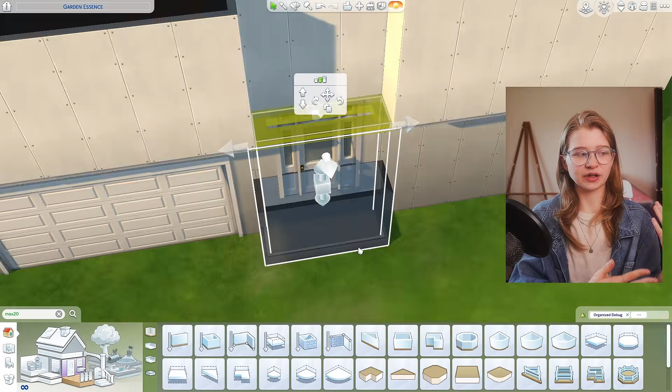He created the prairie style, which was inspired by the flat landscapes of the American Midwest, and it was the first uniquely American architectural style that kickstarted this century where America was really influential in the architectural space. And something you have to remember is that in terms of art and architecture movements, everything is a reaction to the previous thing that came before it.

Nothing is in a void. And that's why we had to start with Frank Lloyd Wright to begin with. But with the prairie style and the emergence of this American architectural movement, you have to understand that in the United States, the stuff being built before this was a lot of Gothic Revival, French Empire, Italianate style homes. Frank Lloyd Wright really wanted to do a new modern American style of architecture.

He wanted it to be distinctly different than the traditional classic stuff that came before it. And he comes up with this idea of organic architecture, that architecture should be suited to its environment, it should be a product of its place, purpose, and time. It's this very modernist idea, this idea of form following function, that's prevalent in a lot of different art movements at this time, not just the architectural ones.

Frank Lloyd Wright is credited with beginning this idea, which I have to say, there is this phenomenon in art, especially the Western art canon, where some guy is attributed as the beginner of this one idea. Certainly he popularized it and is super influential in the architectural canon. But I'm not saying he was definitely the first guy to do this. There's been so many instances where an artist or person is accredited with being the beginner of something, and then it turns out there's someone who did it years, decades, or even centuries before him.

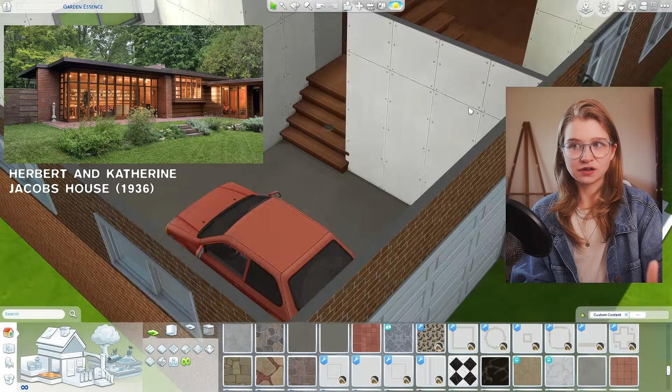But nonetheless, Frank Lloyd Wright is super influential in how we get to the split level home. He also created the Usonian style of architecture—if you guys like these videos, please let me know, because I would love to do more of these architecture deep dives with you. Usonian style of architecture is so interesting because it's the specifically American style of architecture. It literally stands for United States of North America, which is such a mouthful that I always have to think really hard before I say it, or I'll mess it up. But yeah, at some point I'd love to deep dive into that architectural style.

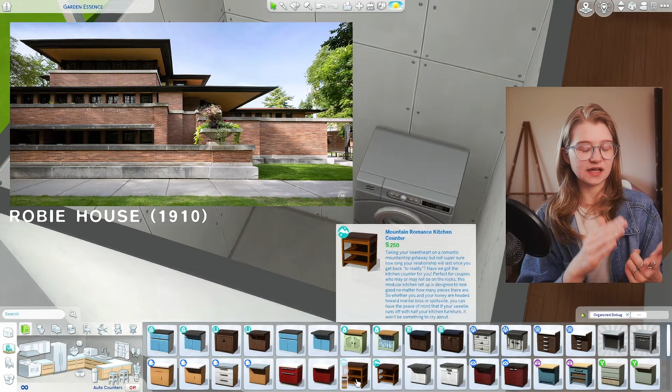But to go back to the prairie style, it was characterized by these low horizontal lines. Like I said, it's inspired by the landscapes of the American Midwest. So it's flat, low to the ground, a little more expansive, it has open floor plans, low-pitched roofs, overhanging eaves, and this connection between the interior world and the exterior world—this connection between inside and nature happening in the prairie style. I've been showing photos this whole time of different prairie style houses that Frank Lloyd Wright created, and you might be thinking to yourself, these aren't that monumental.

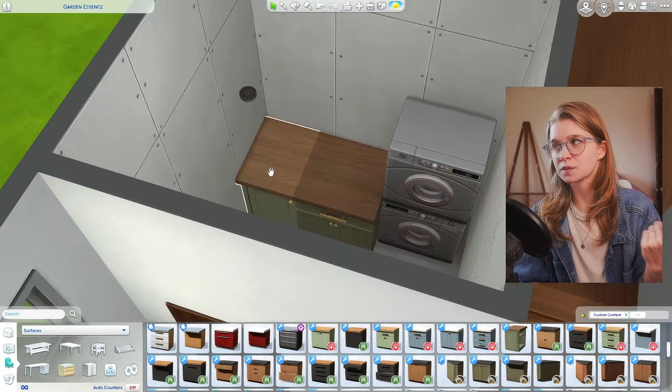I've seen things like this before, kind of interesting, I guess. I want you to look at this house and now imagine a horse and a carriage showing up to it, because that is the time frame in which Frank Lloyd Wright is creating a lot of this stuff. It's not as contemporary as you might think by looking at it. It's kind of mind-blowing to me, honestly.

Prairie style is super influential to all of American architecture, but it's also specifically influential to the ranch style home, which is kind of accredited to this guy, Cliff May. The ranch style is, in my opinion, kind of ubiquitous with American homes. They're also called the American ranch. You see these homes everywhere you go. It's very likely you live in a ranch style house if you live in America. At one point, 9 in 10 homes being built in the US were ranch style homes.

They're everywhere. These homes are long, close to the ground, with wide open layouts. You're kind of seeing the connections between the ranch style and the prairie style. The ranch style fuses the more modernist ideas occurring at the time, the idea of form following function, with the concepts of the American Western period of wide open spaces, kind of the American frontier. A lot of the ranch style has attached garages and these L or U shaped layouts.

It's interesting because Cliff May, who's kind of the beginning of this very influential ranch style in the United States, wasn't even an architect, I guess. He was a building designer, and he was only accredited as an architect for 1 year before he died, which is so unfortunate for him, but he's just so prolific. It's kind of interesting because he wasn't even an architect.

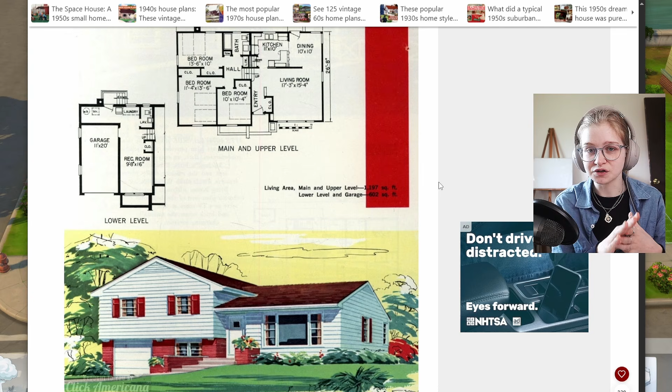Before I start a split level house, and before you start one, I think the easiest thing to do is find a floor plan. I know it's kind of boring to not just make it up, but the whole premise of split level homes is differentiation of space. This prevents you from having a really unrealistic floor plan, especially with a split level that has 4, 5, or 6 different levels. It can get confusing with what level is what. I'll link a bunch of places to find different floor plans down below.

First, we're looking at clickamericana.com, which has a split level 3-bed floor plan from the 50s. This is more of a traditional plan from when split levels were first getting popular, but a split level home doesn't have to be of a certain time frame. You can build a realistic split level house in this game with modern architecture, or anything that came after the 50s, because split levels are a type of home rather than a type of style. You could make a realistic home in any style—it doesn't have to be this more traditional ranch style, but that's what I'm walking through with you today.

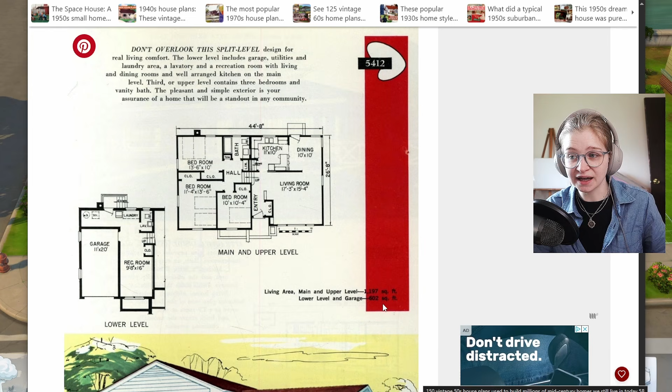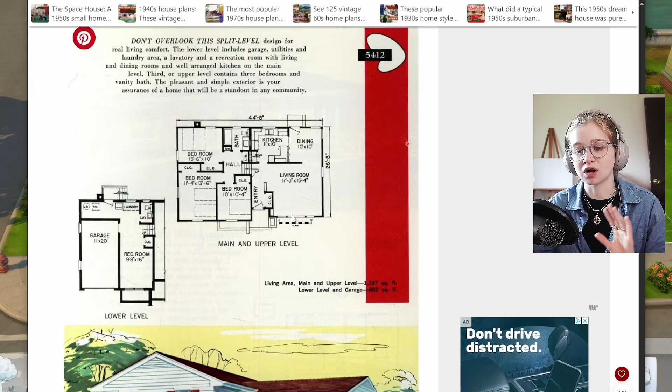Reading floor plans for split level homes gets a little complicated because there are 3 levels, but you're only seeing 2 here. This is the basement lower level, so that's this little section down on the bottom with the garage. Then they put the top level as both of these levels. It can be confusing, but basically this box right here is one level, and this box over here is the other.

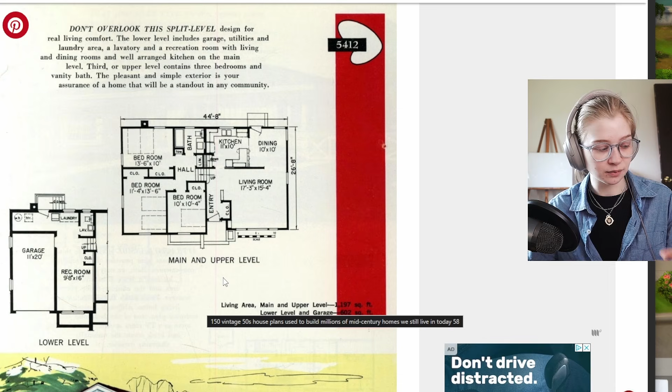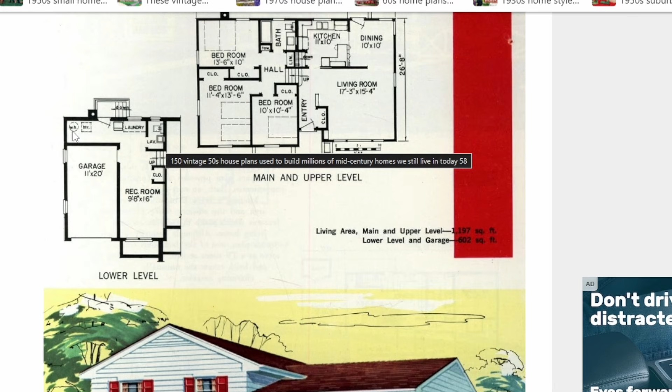Keep in mind what I said about split levels coming from a differentiation of space. So to make a realistic split level, you have different areas for different types of living. In this floor plan, the garage, rec room, laundry, a little bathroom down here, the water tank, and the electricity are probably in this area too—this is the more utility downstairs area.

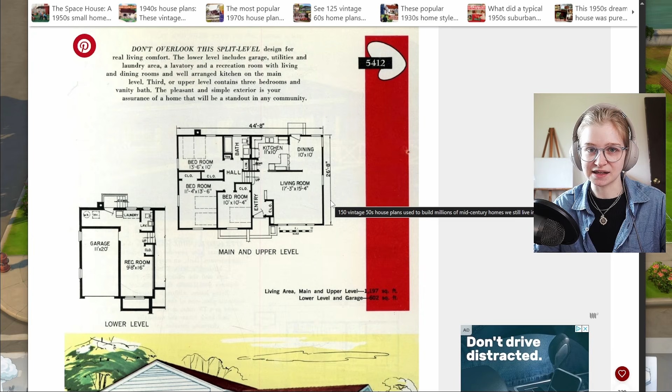And then you go up these stairs and it spits you out up here, and you go into the kitchen, the dining, and then a living room, which is kind of different from the rec room or a family room. It's just an additional living space, could be a little bit more formal. It's where you might want to entertain guests, whereas downstairs might be your messy kids play room. And then if you go up the stairs again, you get 3 bedrooms and a bathroom with this plan.

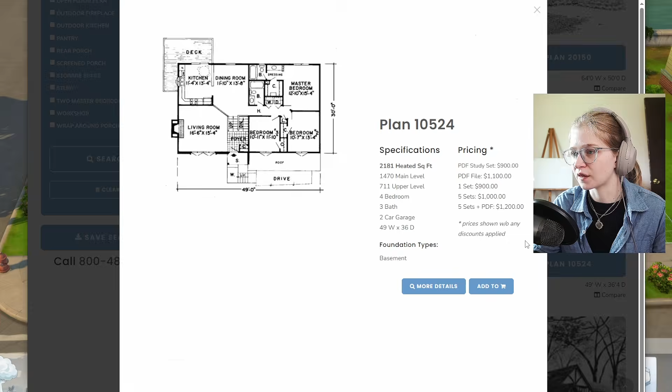Another website that I like for more retro plans is Family Home Plans, and if you just scroll on the retro plans, you can see that these are all pretty much older plans. Like here, for example, this is a split level house - a 4-bedroom, 3-bathroom, 2-car garage house, and it has a basement.

I think this is a good example of a plan that would be helpful in terms of layout, because this layout is actually a little bit different in the fact that there is a bedroom in this downstairs utility area I was talking about. I've seen other people say that this is how their houses are laid out in real life. I've also seen people say this is a good guest bedroom because the guest can have their own privacy, or it could alternatively be an office space.

This is also a unique plan because it has a family room downstairs, but also a basement, and I think the basement in this plan is unfinished. Maybe your sim has a secret cider making operation, I don't know. But the way this plan works is if you walk into the front door, you are on the foyer, which is technically on the 2nd level, or 3rd if you're counting the basement, but the 2nd level of the actual living spaces of the house.

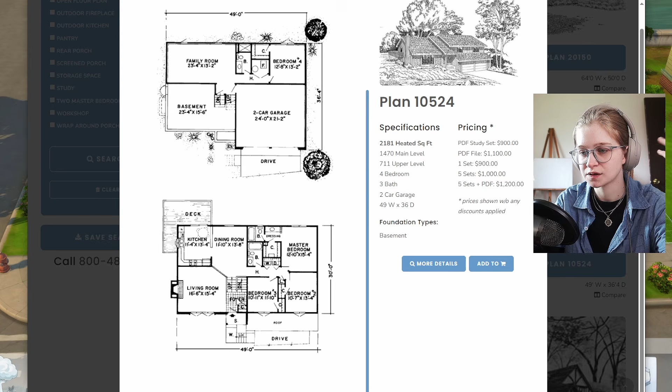The living room is on the same level as the foyer, but if you go up, there's the dining room, a kitchen, and then the bedrooms are alongside it. So this one's interesting - it doesn't have that differentiation of the kitchen, dining, and living being on a separate story from the bedrooms. So it's not always a steadfast rule, but I find it's easier to follow a floor plan than to just go off the rails and do whatever you want.

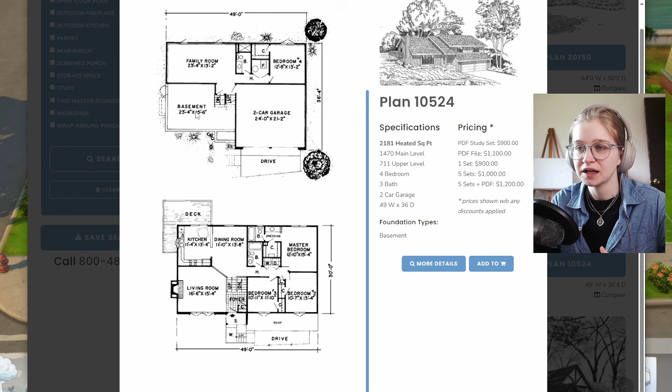And if you go down, you end up in a family room. There's a 4th bedroom, like I said, the guest room, garage area, and then you can go down again into that basement. So this is an example of 4 levels technically if you count the basement, 3 if you're not counting the unfinished basement.

Another option for floor plans is the House Plan Company. This website I kind of hate because I feel like their plans are usually abominations, I'm going to be completely honest. These are very contemporary style homes. If you have a more contemporary style than I do, you might like this website.

Keeping in mind the general separation of spaces, I think I'm gonna do a 3 split home where there's 2 stories and then 1 story on one side. And I think I'm gonna follow that plan that I got off Click Americana.

Okay, to begin to make a split level house, in this game I find the easiest way to do this is to start with the garage. So I'm just gonna go ahead and place a little garage door. You can use the City Living one, or you could download custom content like a garage door. So this is the City Living one - it has a particular look to it.

I have downloaded some of these by Max 20, a standard narrow garage door. We're gonna use the narrow one because this floor plan that I'm following has a family rec room kind of alongside the garage, so it's gonna be a bit weird - a narrow garage and a narrow rec room, which might be a bit interesting to furnish in this game, but I'm not gonna be furnishing today, so I don't have to worry about that.

I think I am gonna make this one longer so that 2 windows will fit along there, but I think all this is as wide as I want it to be, and I'm just gonna go ahead and make a square really quick. And then in order to get the split level thing, technically it would start halfway between this level we're currently on and the upper level.

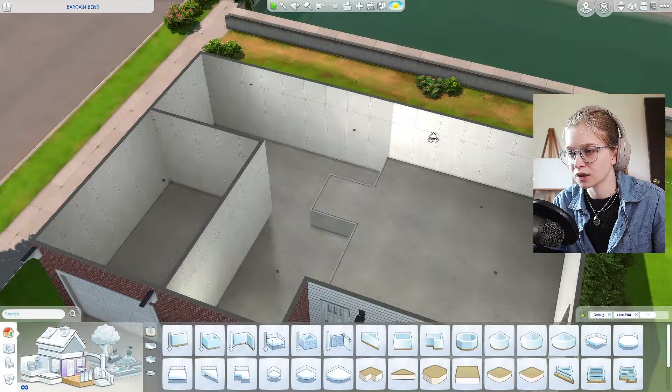So I'm going to extend this out to there and get a set of stairs, doesn't matter which, and I'm just gonna do that, and then boom, stairs up. And I think I'm gonna want the stairs to be one more over. Yes, because we're gonna need room for a bathroom in this little corner once we do the floor plan for upstairs, so I think the stairs are gonna be down there.

Don't worry, we're gonna hide this with a wall. So we're just gonna draw a wall like that, wall down there, because this area is like the laundry. And I think this whole house is actually a little bit wider than it needs to be, which is good, because we need room for this back patio. So I'm actually gonna shrink the whole downstairs.

The upstairs I'm gonna leave like this because it can add to this kind of design style of it all. And then we're gonna do stairs right next to this going up into this living space. And I am gonna do this one two wide, and then I'm gonna do another wall right there. And we can do some little handrails on both these stairs.

So it's a pretty small rec room. That's okay, I think that's perfectly acceptable for The Sims 4 to just have a little rec area. Maybe this is like a crafts room. This is going to be a bathroom, and then this area is going to be a laundry and water heater space. I'm deviating a little bit from the original floor plan, but I just think that works better within the confines of this game.

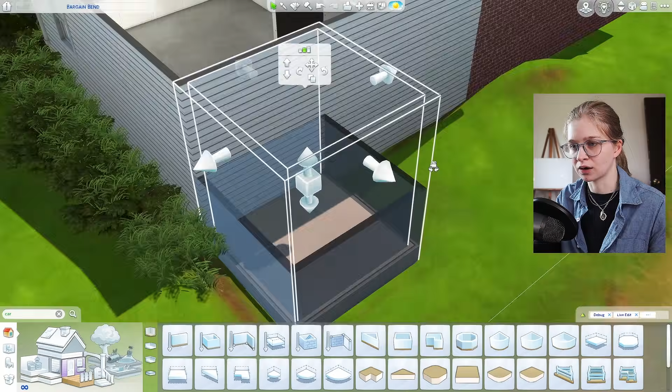So I'm going to place one of these. It does need to be raised the same amount as the interior so that the door opens right onto the patio instead of dropping 8 feet. And you could actually kind of smooth out the landscaping a little bit more so that you don't even really have to fully deal with this.

It'll make this side of the house look a bit odd because there will just be this random spot where it kind of changes. Once again, landscaping is your friend. You can hide pretty much everything with landscaping.

I'm just gonna do like a little patio kind of thing. I might make it brown, and then I think I might also make the fencing on this brown as well. To make it look a little bit less weird, I might extend the patio all the way out to that edge there. That kind of helps.

And then I'm gonna get a wood board to kind of stick on here. And then I'm gonna work on windows.

So I think because it's the kitchen, the best window is gonna be like a short, skinny one. So let me find that one. I like this one actually. So I think I'm gonna use this one from Snowy Escape. There's also that new one that we got, which could totally work here too, but it's a little bit wider, and I think I want just one that's a little bit smaller of a size.

So I'm gonna grab that one, and then that leaves a perfect spot for the sink to be right below where the window will go, which I love to do in my kitchens. This layout actually turns out pretty similar to the one I did in my speed build. Incidentally, that was not on purpose, but we did kind of just end up that way.